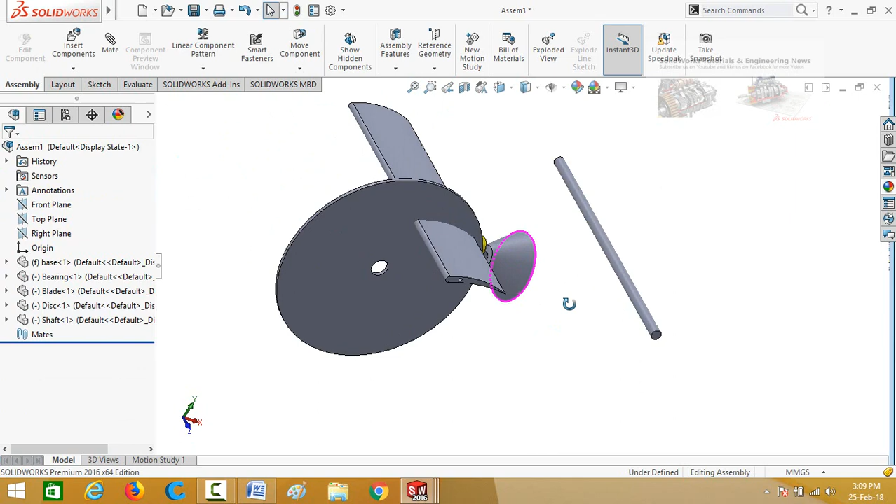Click on this cylindrical face of the shaft and then select mate. Now select this cylindrical face of base and press this button to lock rotation. Now press OK button.

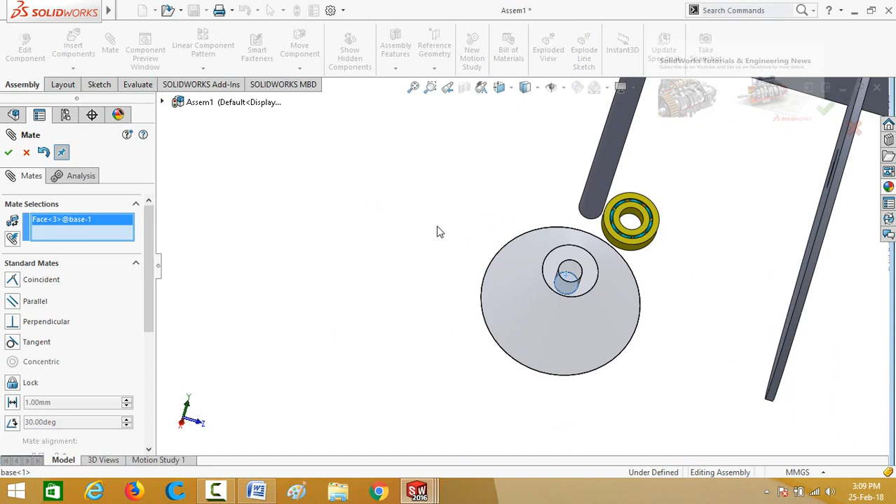Now select this face of base and then this face of shaft. Press OK button again.

Select this cylindrical face of disc and then this cylindrical face of shaft and do not lock rotation. Press OK button.

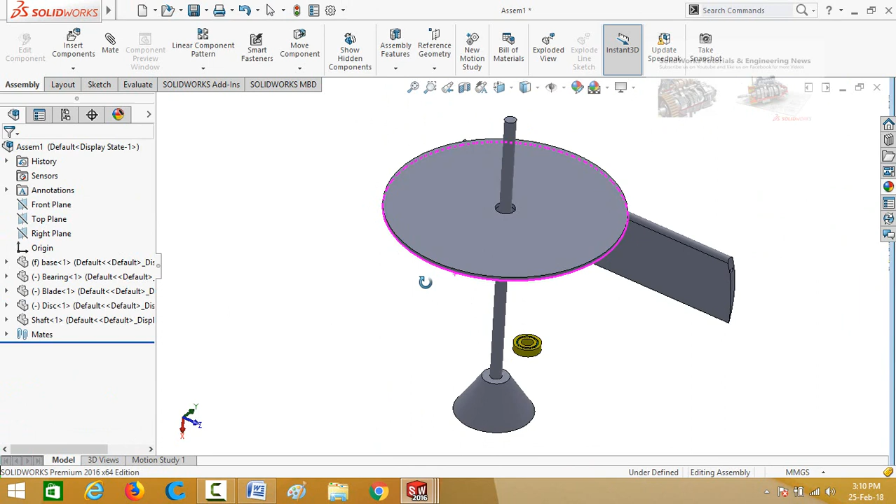Again press OK button. Now we have to design the bearing bracket for this bearing. So start from a new part again.

Sketch on front plane and then draw a center line started from origin. Now draw a line.

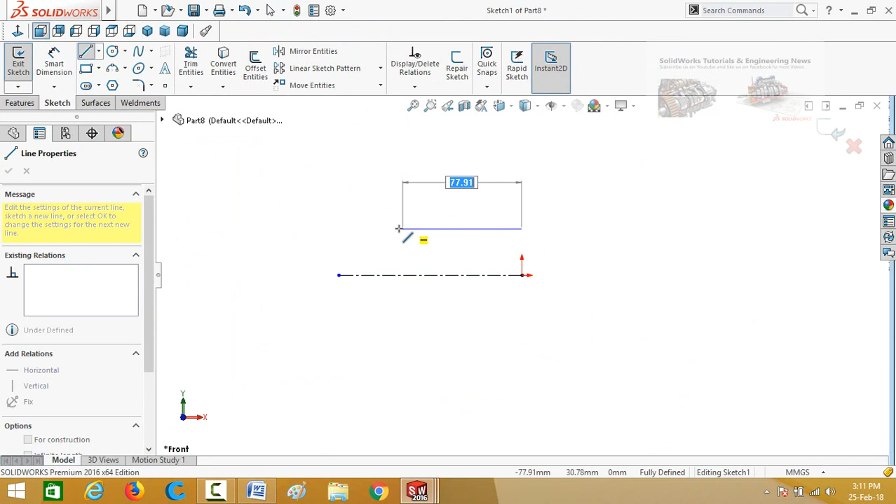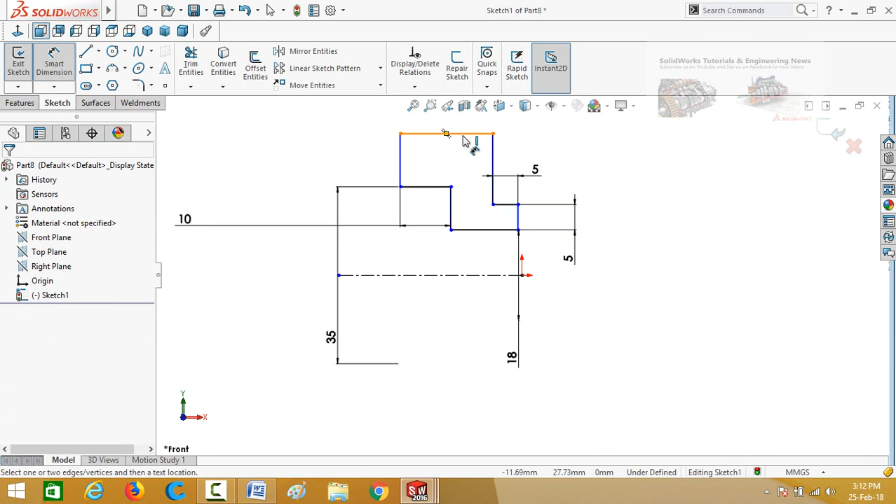Close the sketch and define the dimensions. This length is 10 millimeter. This diameter is 18 millimeter. This diameter is 35 millimeter. This length is 5 millimeter. This length is also 5 millimeter. And this length is 8 millimeter.

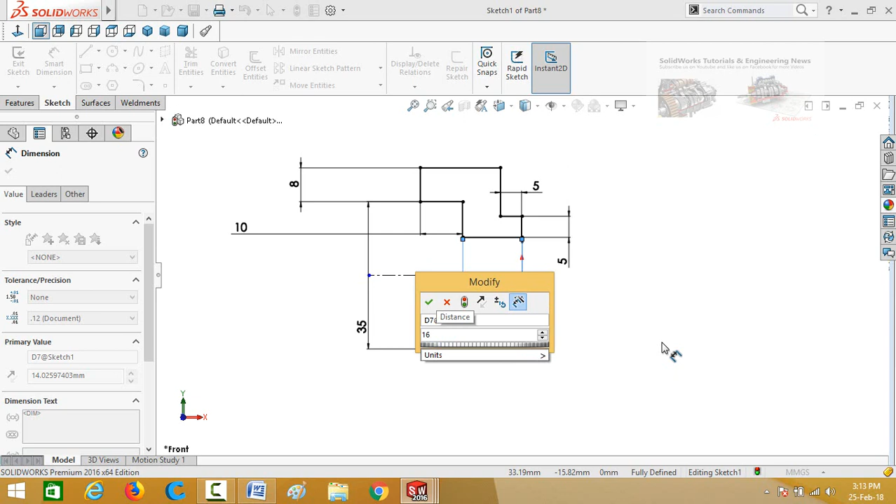Press escape button and then select this point and then the origin, make their relation vertical. Now define this length, 16 millimeter. So our sketch is now fully defined.

Go to features tab and apply a revolved boss base command. Press OK button to save or apply this command. Save it as bearing bracket.

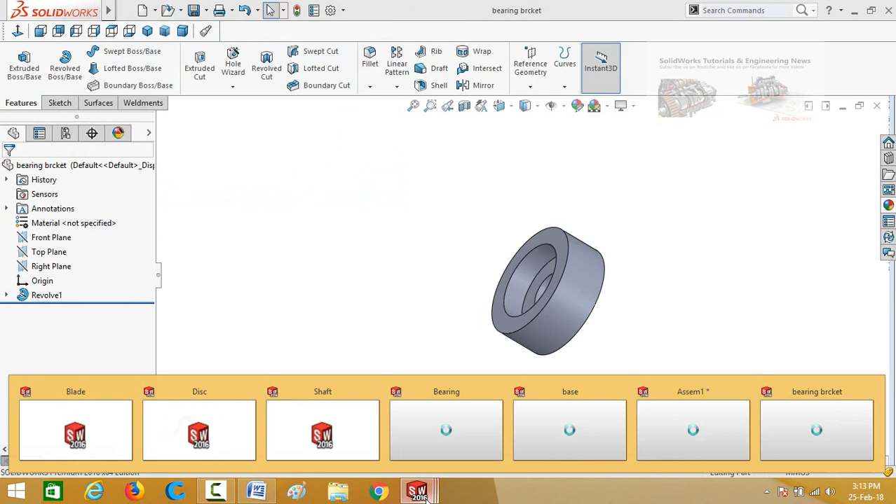Go to assembly and import this bearing bracket. Now we have to create, so start a new part again.

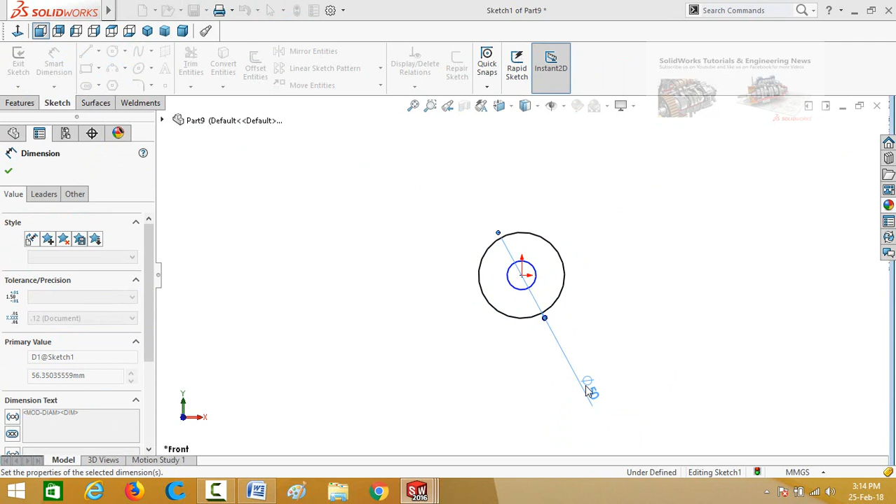Sketch on front plane. Draw two circles, define them. Outer circle has the diameter of 50 millimeter and inner circle has the diameter of 30 millimeter.

Press OK button and then go to features tab and apply extruded boss extrude command. Extrusion thickness is 20 millimeter and press OK button. Now save this part as magnet.

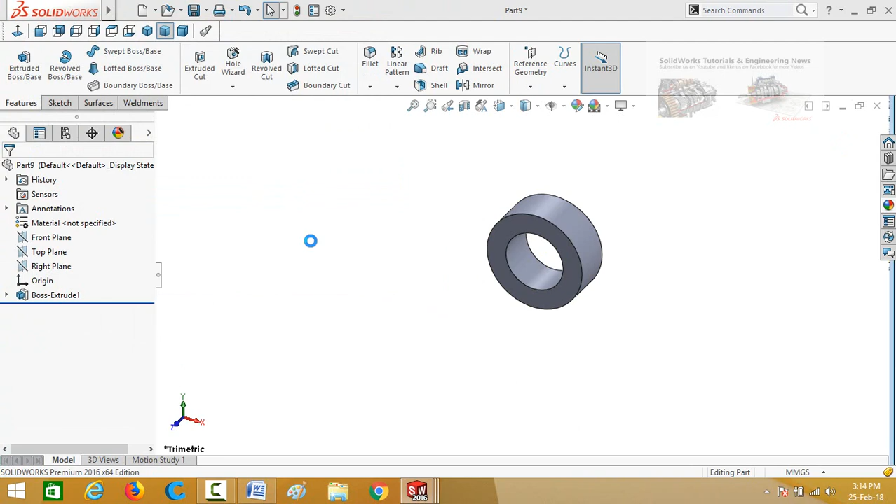Go to assembly and import the magnet. Now assemble them one by one.

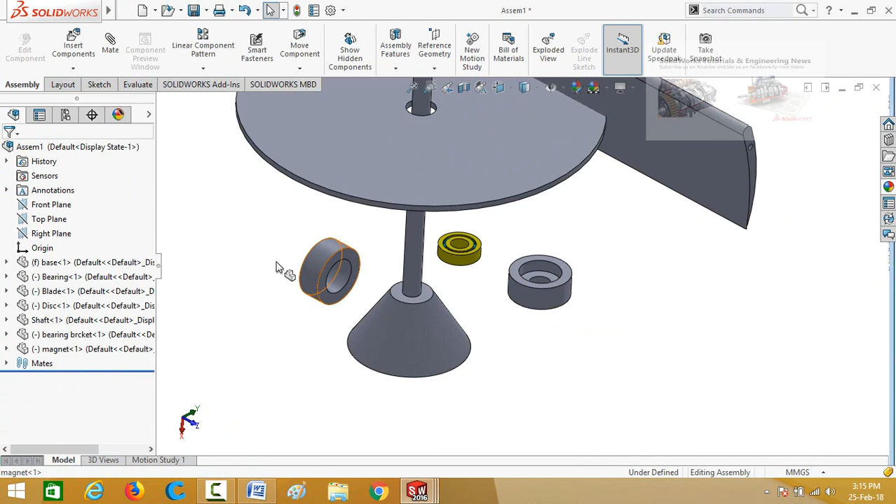First of all, we need two magnets. So press and hold control key and then drag the magnet to make a duplicate.

Click on this cylindrical face of magnet and select mate. Now select this cylindrical face of another magnet. Do not lock rotation. Press OK button.

Again select this cylindrical face of magnet and then select this shaft's cylindrical face. At this time also do not lock rotation. Press OK button.

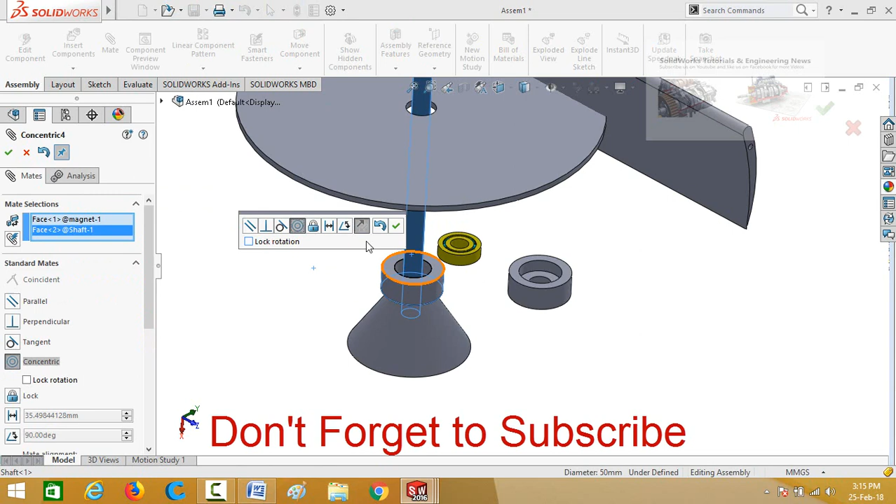Now select this face of base and then this face of the disc. Press OK button.

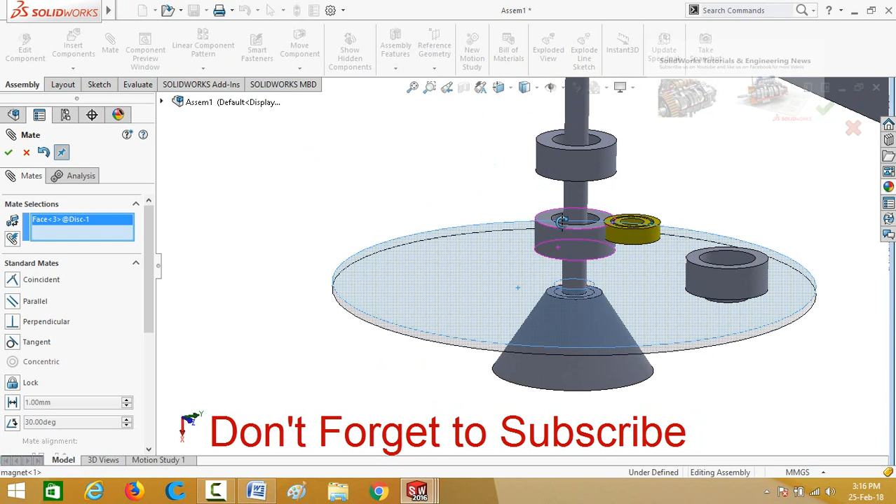Now select this face of disc and then this face of magnet. Press OK button. Press this button OK, and then we need two more discs.

We need two more discs. So press and hold control key from your keyboard and then drag the discs to make a triplicate.

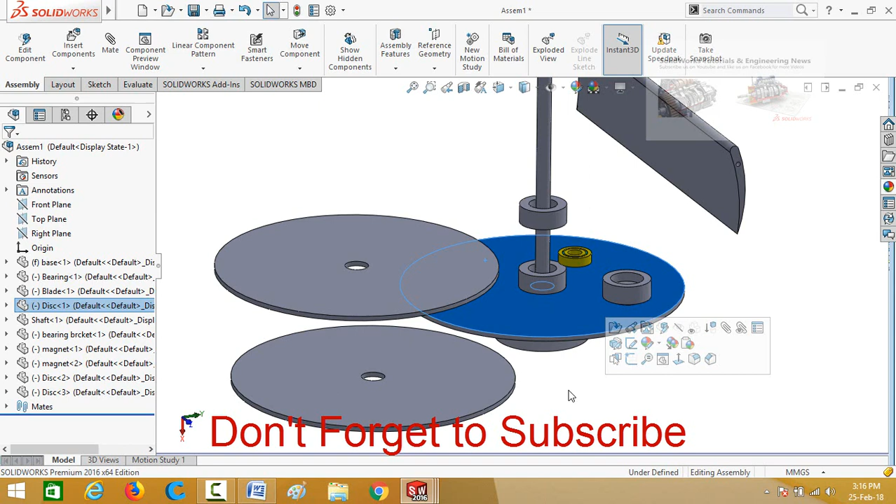Now select this face of one disc and then this face of another disc, and at this time lock the rotation. Press OK button.

Again select this face and then this face of shaft. Do not lock rotation. Press OK button.

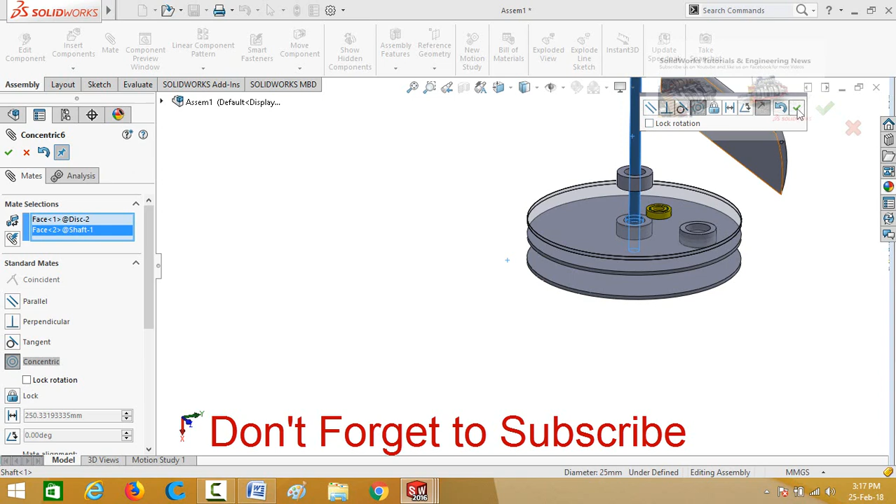Now select this face and then this face of disc. Select distance mate from here and type the distance, which is 400 millimeter. Now press OK button.

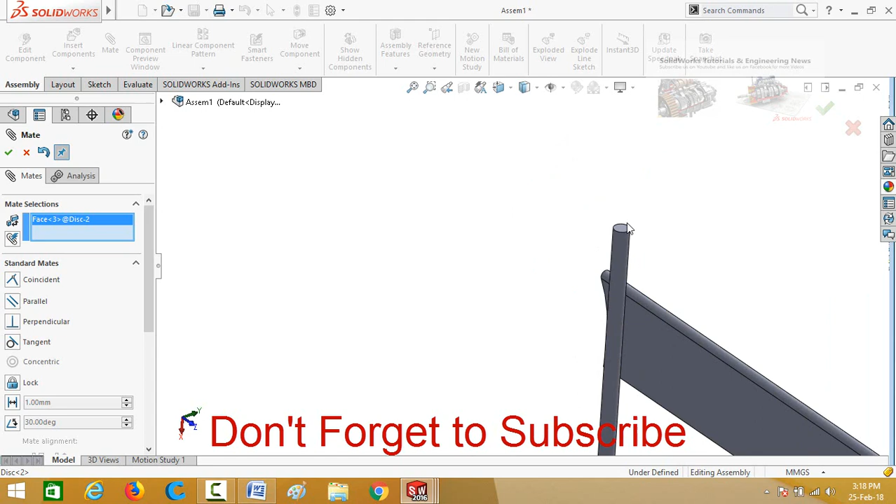Now select this face of another disc and then select this face of shaft. Select distance and type the distance, which is 50 millimeter. Press OK button. Again press OK button.

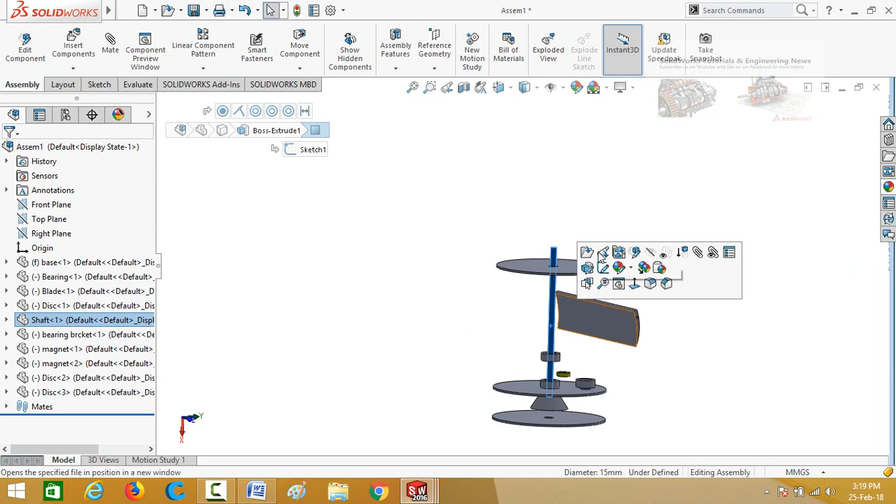Now we have to increase the length of the shaft. So for that, click on the shaft and open it in a new window, and then click on this Boss Extrude 1 and select Edit Feature. Type here the total length of the shaft, 600 millimeter, and press OK button.

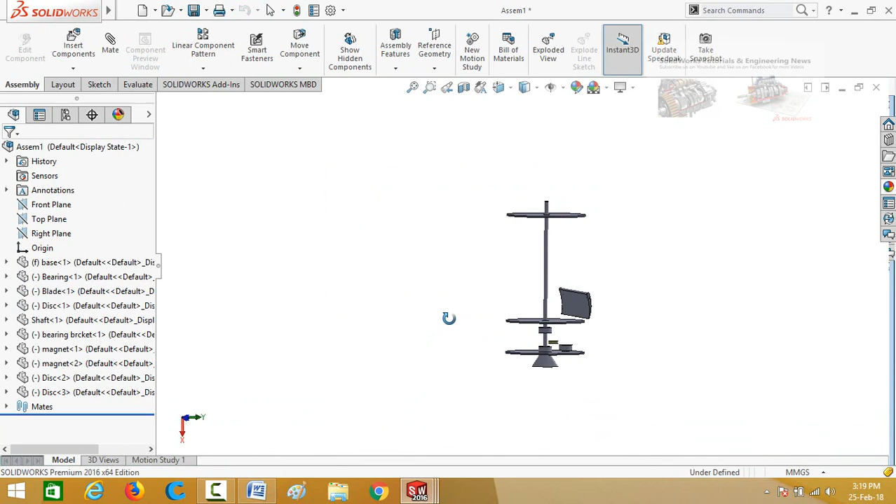Now go to assembly once again. Now it's OK. Now it's time to assemble bearings.

So similarly we need two bearings and two bearing brackets. So press and hold control key and drag the bearing bracket and also drag the bearing to make duplicates.

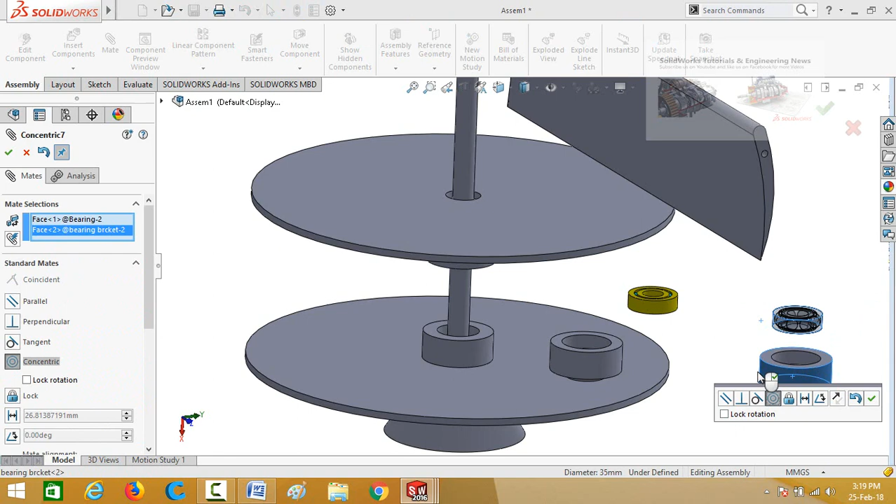Now click on this cylindrical face of bearing and mate it with this cylindrical face of bearing bracket. Do not lock rotation. Press OK button.

Now select this face of bearing bracket and then select this face of bearing. Again press OK button. Now select this cylindrical face of another bearing bracket and then this cylindrical face of bearing. Do not lock rotation. Press OK button.

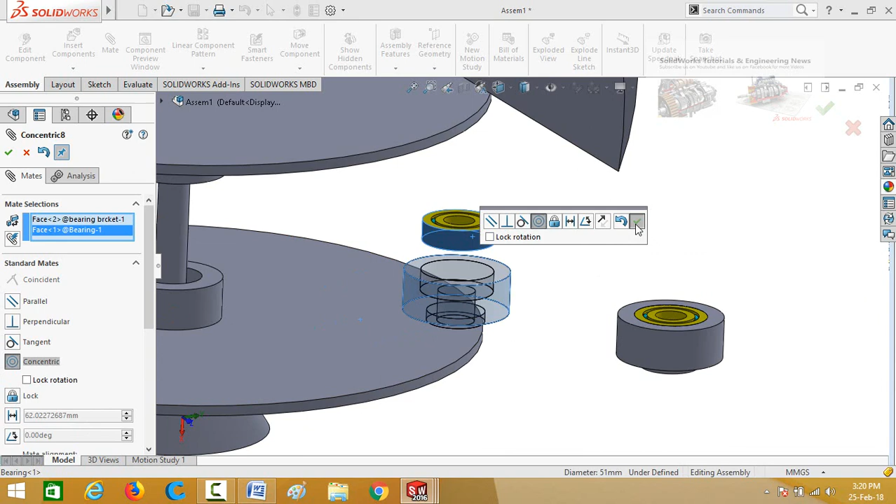Now select this face and then this face. Press OK button.

Now select this face of bearing bracket and then this face of shaft. From here, flip mate alignment and press OK button.

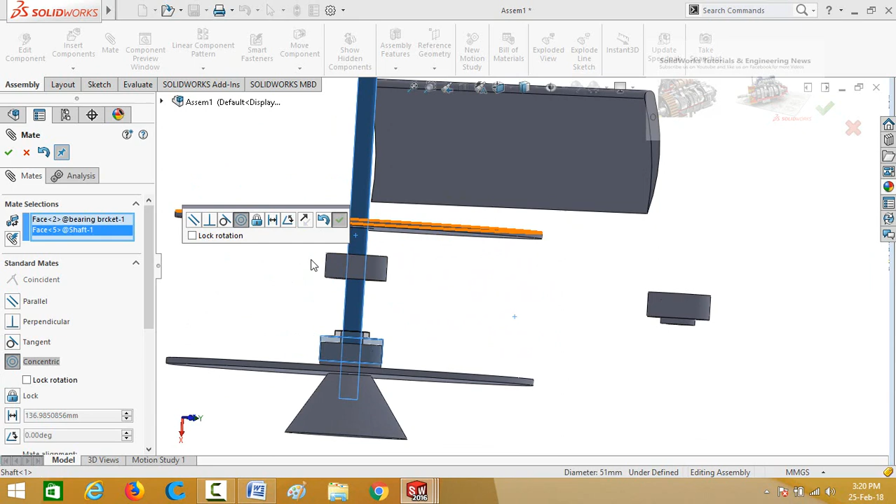Now select this face of bearing bracket and then this face of disc. Press OK button.

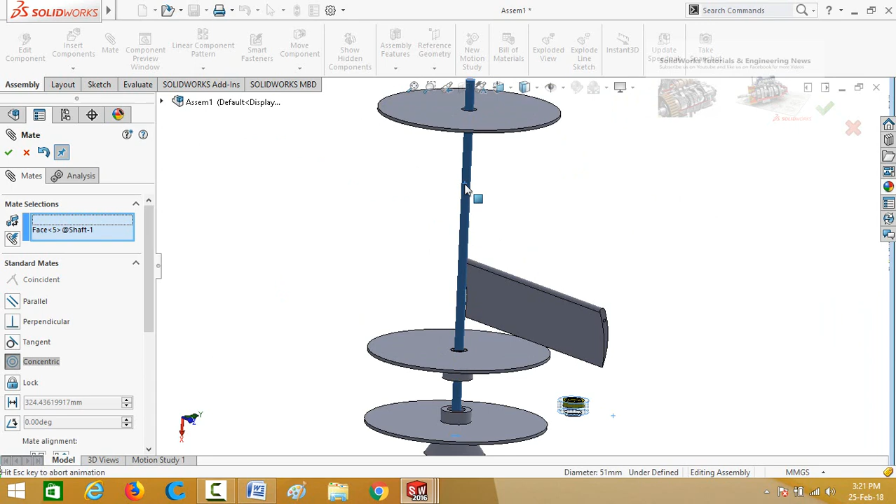Now select this another bearing bracket and mate it with the shaft. Press OK button. Then select this face of another disc and mate it with this face of bearing bracket. Press OK button.

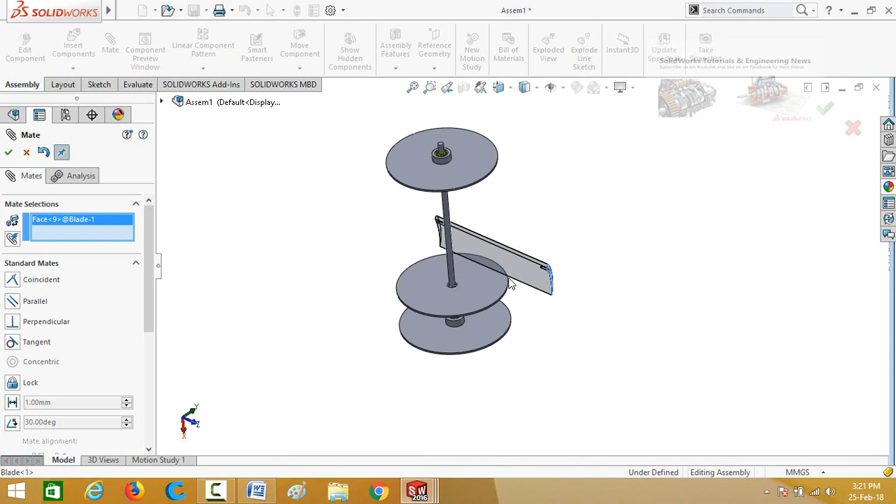Now select this face of blade and mate it with this face of disc. Press OK button. Similarly for the other side, press OK button. Again press OK button.

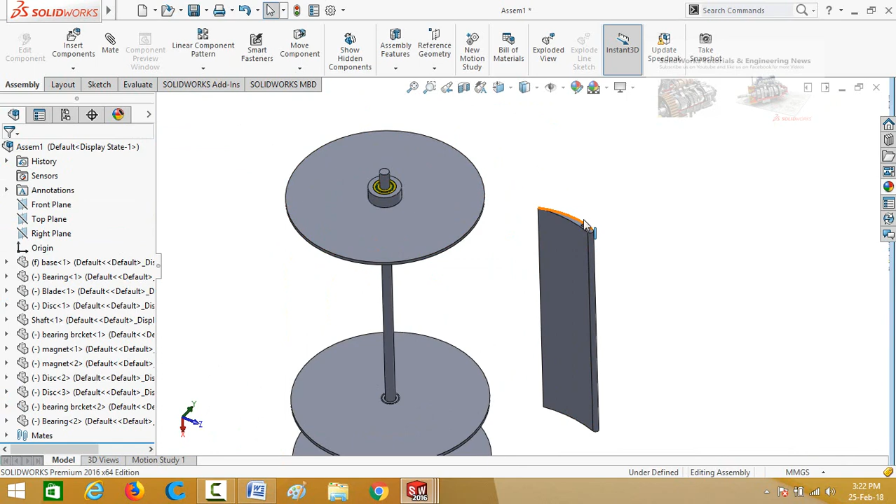Now we have to create holes on the disc to mate with this hole. So for that, click on the disc and open it in a new window.

Then click on the disc and then select sketch. Make normal to and draw a circle. Start it from origin. From here, check this box for construction and press OK button.

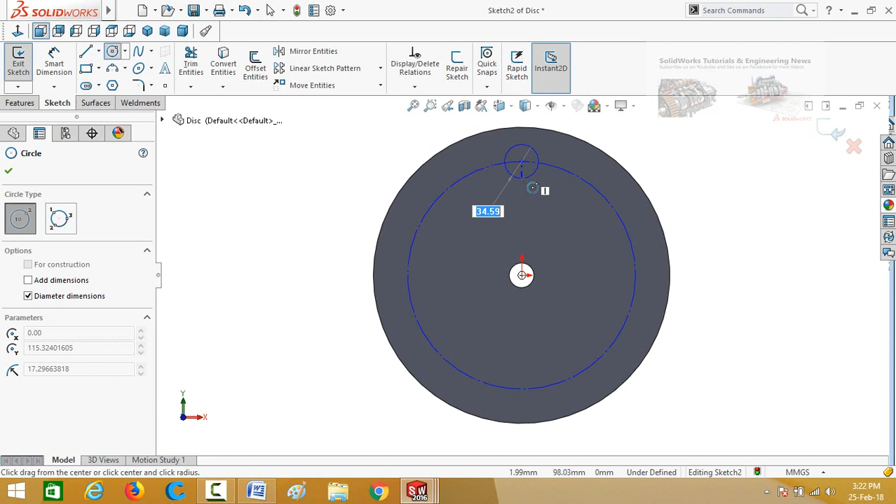Again draw a circle on this quadrant. Now define. This diameter is 6 millimeter and this diameter is 250 millimeter.

Go to Features tab and then select Extruded Cut command. Press OK button.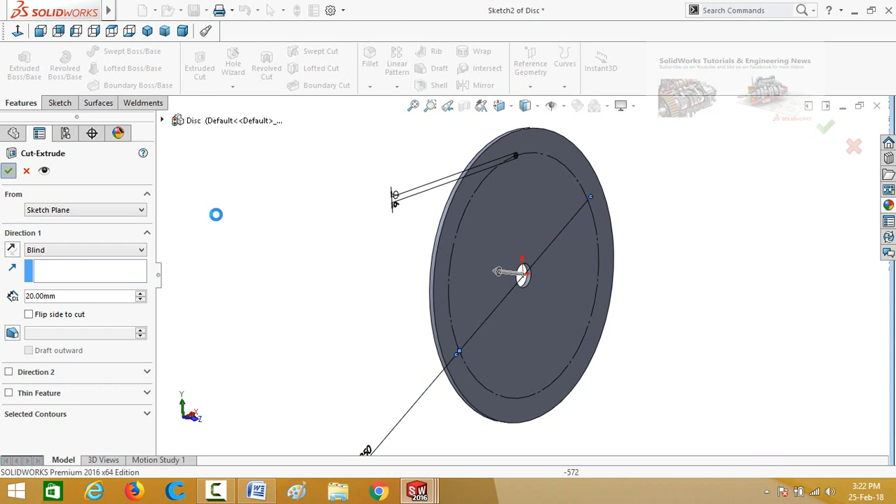Now click on this arrow below the linear pattern and then select circular pattern. Drop down these options and then select Cut Extrude 1. Now click on this box pattern axis and then select this circular edge. Type the quantity, which is 3, and press OK button.

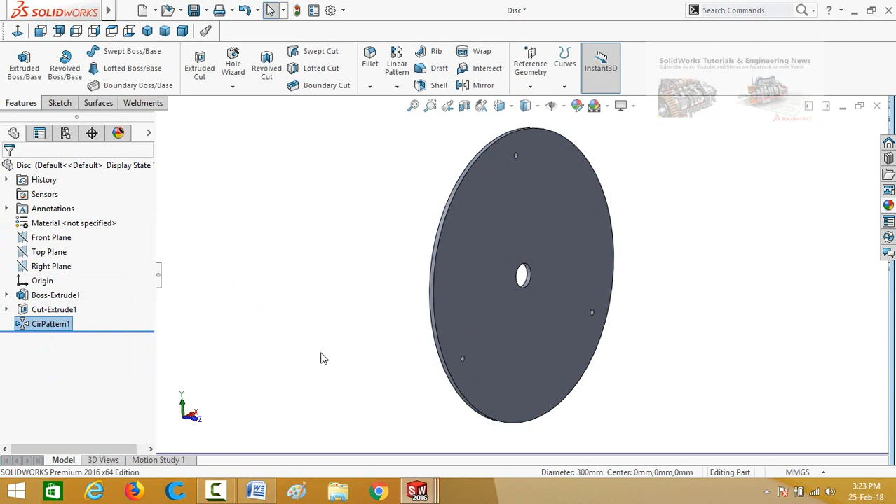Save it and then go to assembly. Now click on this circular or cylindrical face and select mate.

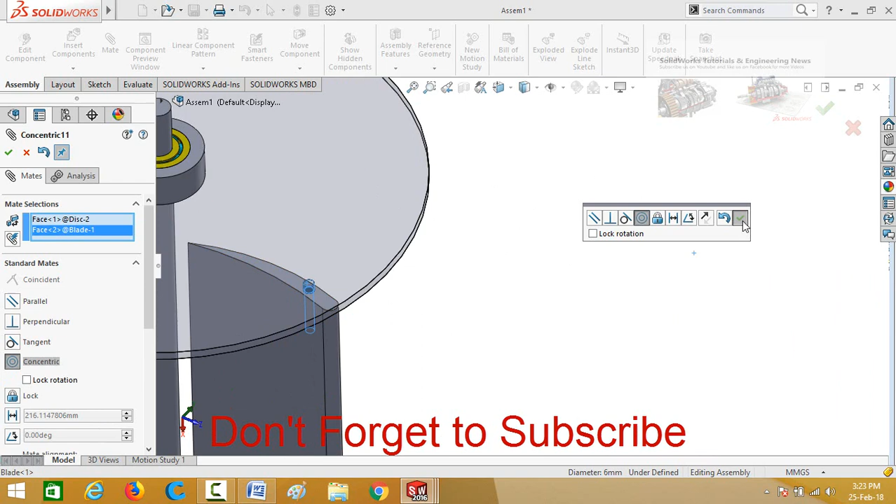Then click on this hole and press OK button. Again press OK button.

Now manually adjust the angle of the blade. So it's better if you right click on the disc and then select fix. Close. Now adjust the angle.

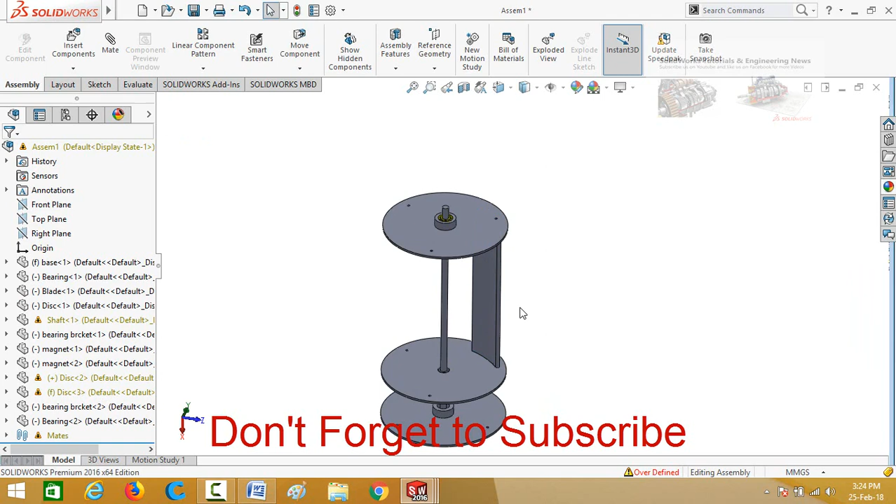Again right click on the disc and then select float. Now scroll down from here and drop down the mates option.

From here select concentric mate and then edit feature. Now lock the rotation and press OK button.

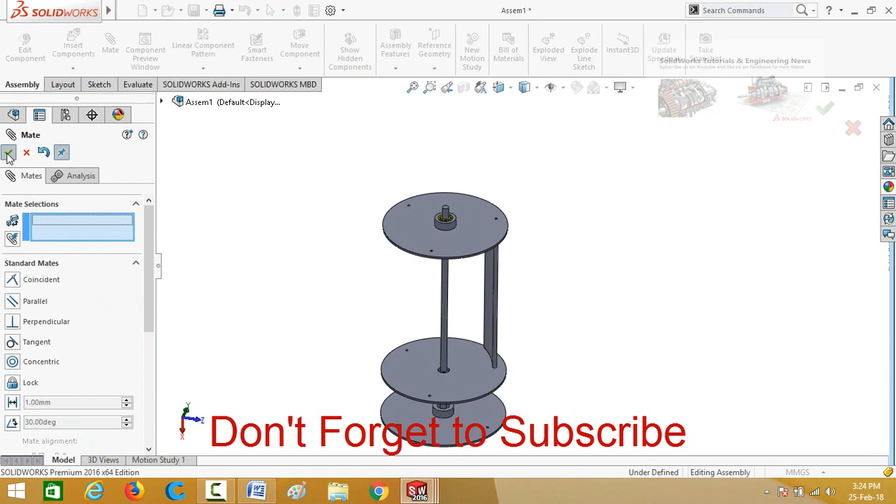Again press OK button. Now click on this arrow below the linear component pattern and then select circular component pattern. Select this blade as components to pattern and then click on this box pattern axis. Then select this circular edge.

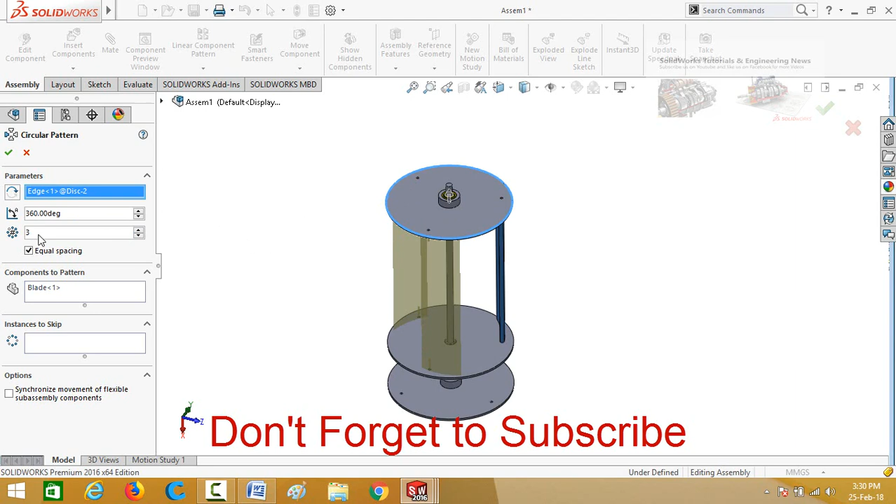We need quantity 3 and check this box for equal spacing and press OK button.

So on this disc, after manufacturing this maglev project, we will paste the magnets, and on this disc we will place the coils to generate electricity.

Hope you enjoyed this video.